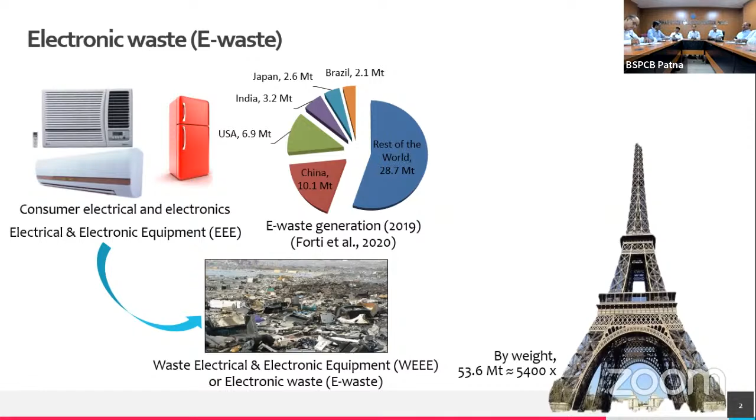From this recycled electronic waste, around 5,000 medals were made.

Now this is happening because of technology. This obsolescence stage is getting shorter and shorter, so we need to think about how to deal with this waste.

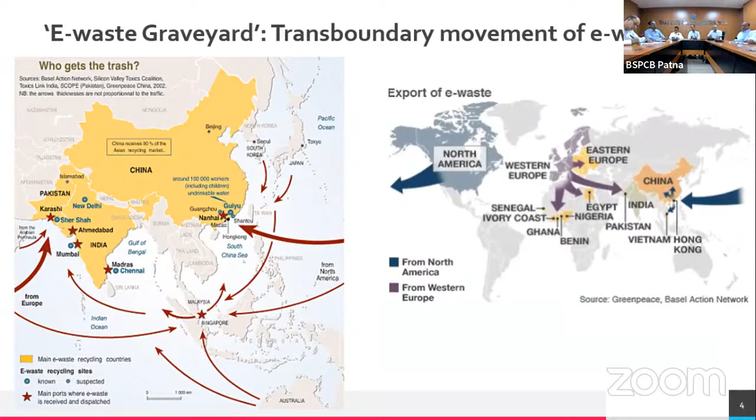Now let us look at the national status. So we have a timeline starting from 2005, where the CPCB estimate said 0.15 million metric tons, and over the years, by different organizations including CPCB, in 2012 it was 0.8 million metric tons. The latest estimate by the United Nations says India generated 3.2 million metric tons of e-waste, and we are rated among the third highest in the world.

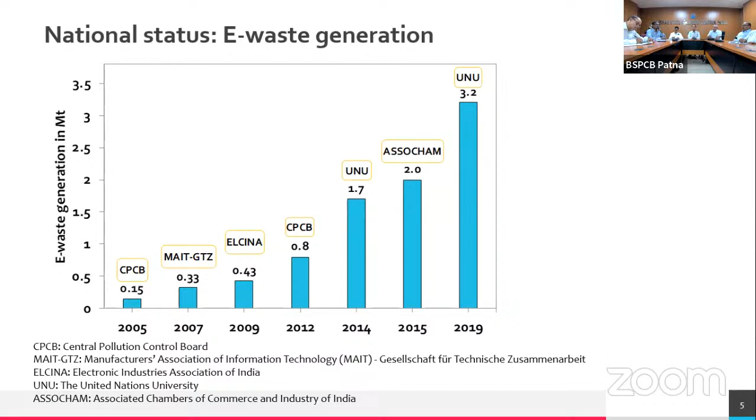Now this is a conservative estimate. Once we have statewide generation figures, in terms of percentage, in India, it starts with around 20% of generation from states like Maharashtra, Andhra Pradesh and so on, with an estimate of around 0.15 to 2 million metric tons.

What is e-waste generated in India? We are essentially... so if you look at the chart on the right side, you can see that only around 20% is formally handled, whereas a big percentage goes through informal channels.

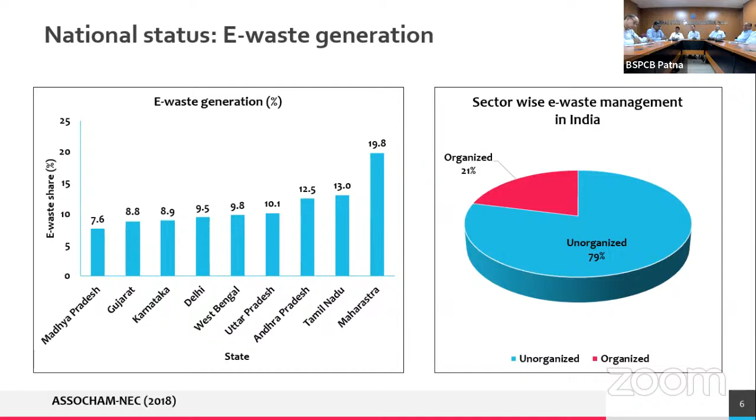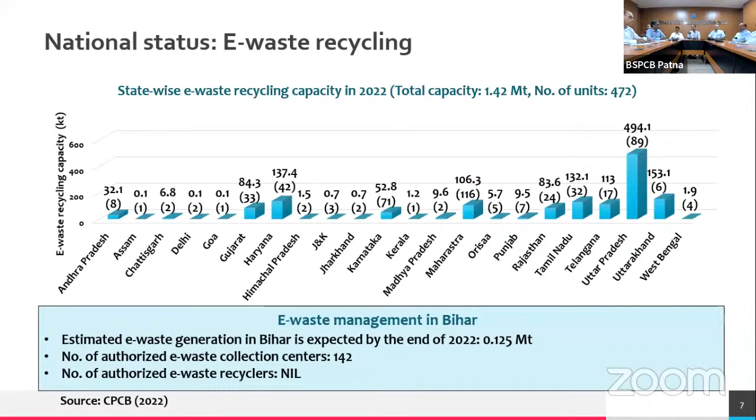This informal recycling sector operates mostly in Delhi NCR, where cheap labor is available and used for these facilities. We have a lot of such recycling sites there, and they typically use rudimentary or primitive technology.

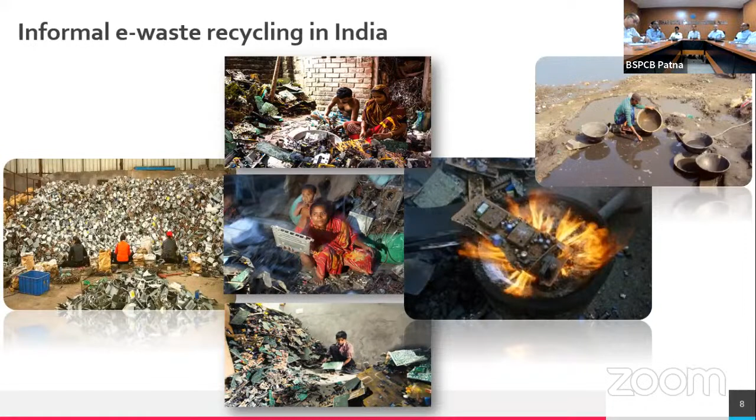Let's talk about e-waste regulation. First I will provide an overview of regulation all over the world. E-waste regulation started way back in the 1990s in Switzerland, Japan, and Germany.

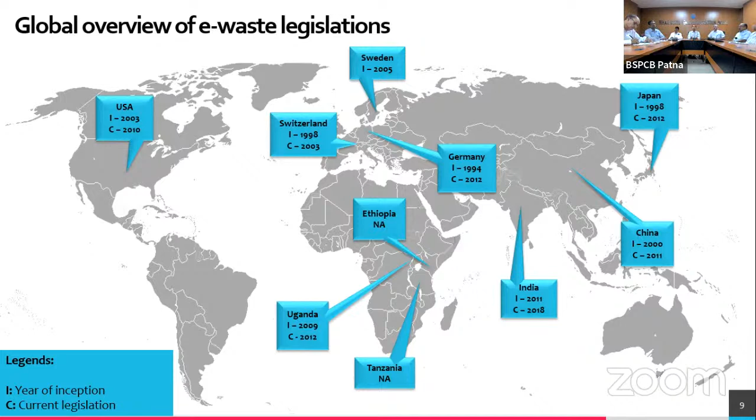In India, we started focusing on developing a system around 2011, with some earlier provisions. This was then amended in 2018, and right now it is known as e-waste management rules. These are the second set of features I will mention; I will not go into the next part as it is already being dealt with.

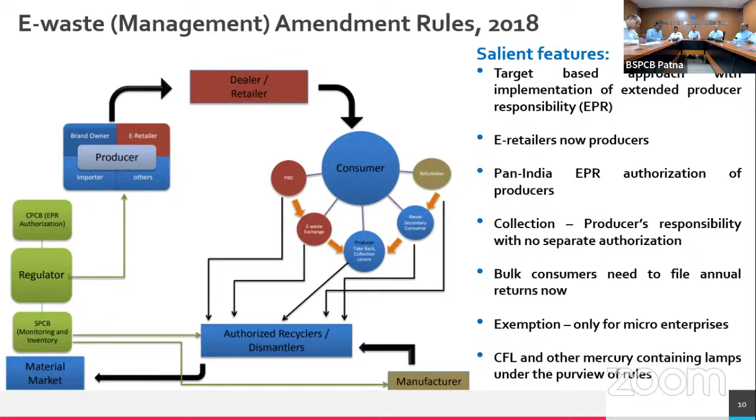So as I have mentioned, the stakeholders in this entire framework are essentially the generator, which includes the consumer and the bulk consumers. Then you have the e-waste handlers and processors, which include the producers, or the producer responsibility organizations through EPR, and producers also consist of the dealer, retailer, and e-retailer. Then you have recyclers and dismantlers, who come under the e-waste handler and processor chain. And then you have the regulatory bodies I have mentioned: the Central Pollution Control Board, State Pollution Control Board, or the pollution control committees in the union territories.

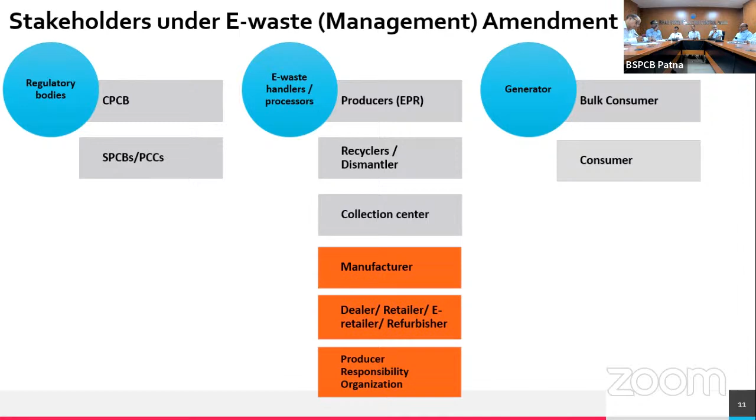Now let us introduce the circular economy, or the CE for e-waste, as a tool. So far, what we are doing is essentially getting a lot of natural resources, making this into a tech, then making this product, the electrical and electronic equipment, and then using it and disposing it. So what you have now is a take, make, use, and dispose model.

Now the circular economy is essentially a regenerative economic system, which transitions from this take, make, use, dispose model to a take, make, use, and regenerate resource model. Thereby, the e-waste which earlier used to be thrown away or disposed of improperly or unscientifically results in a lot of wastage of resources and economic value. Also, you have environmental pollution as well.

So transitioning from this take, make, use, dispose model to a take, make, use, regenerate resource model, we can have sustained economic growth, environmental protection, and it will also lead to a lot of job creation and societal well-being. This is in line with the sustainable development goals we need to fulfill by 2030.

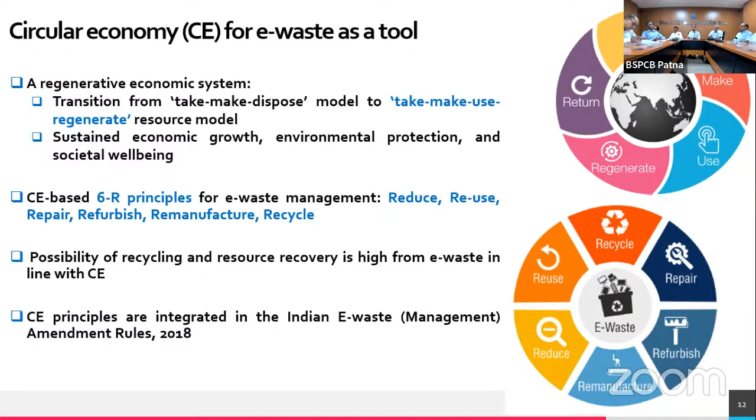Now let us look at the e-waste composition. If you look at e-waste as an overall stream, you will see typically around 37% glass and 30% plastic. We know glass has a typical recycling route, as does plastic, so we will not essentially focus on glass and plastic in this talk. Instead, as the title says, we focus on the metallic part.

When you talk about metals in e-waste, you mostly have iron, copper, aluminum, zinc, and lead. Although these are the metals most prevalent in terms of weight percentage, apart from that, most importantly, we have a lot of precious metals—you can think of silver, gold, platinum. They are also present in substantial amounts.

Apart from that, we have a lot of rare earth elements, which are not typically focused on in the e-waste stream. These rare earth elements are essentially pivotal for the development of any new technology in the electrical and electronic equipment sector.

Now, the typical source of these rare earth elements is ores from mining. These mines are monopolistically controlled by a few countries, including China. China has stopped exporting these rare earth elements. Another aspect is that the extraction of these rare earth elements from the ores is also very cumbersome.

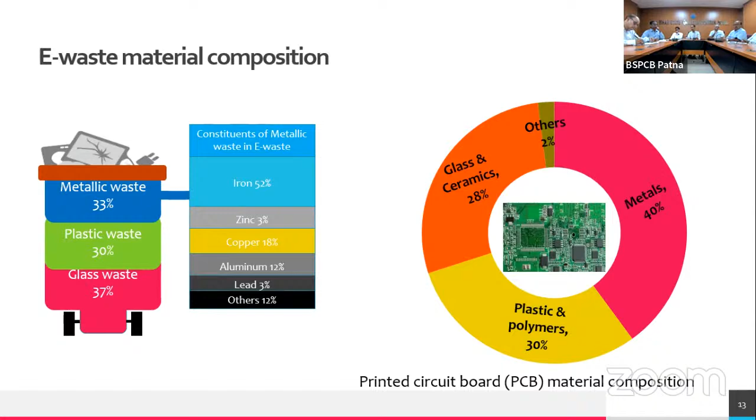Based on this, I can show you an example from our laboratory in IIT Patna, in the Pollution Prevention Resource Recovery Laboratory. Here you can see a typical end-of-life computer printed circuit board, with a lot of mounted components apart from the base material or platform.

You can name any element present in these mounted components, whether capacitors, resistors, or solders. Apart from these mounted components, the base or frame also contains a lot of metals. People will understand why we use gold and silver here - they're typically used as soldering material, apart from lead and tin.

We also need to provide a thin film over this, essentially of gold and silver, to protect these embedded metals from the corrosive environment. Otherwise, these electrical signal pathways will get corroded over the years. So a thin film of gold and silver is provided. This is one example.

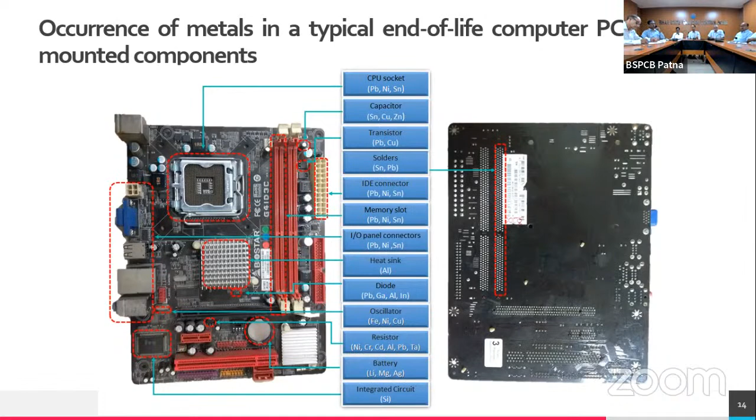Similarly, this is a typical printed circuit board of a smartphone. As you can see, the mounted components here - you name any one - contain a lot of metals, including precious metals and rare earth metals.

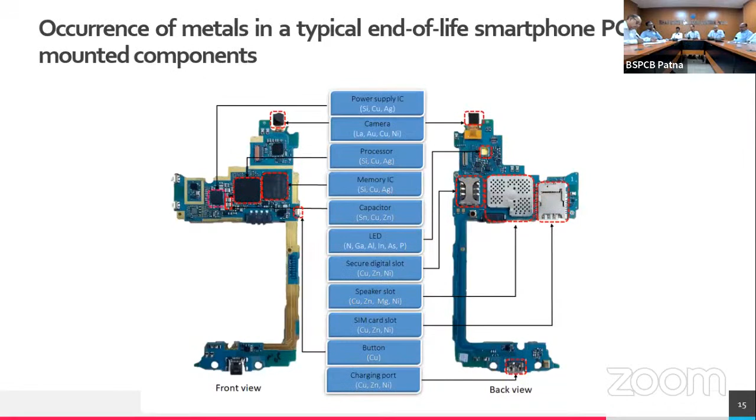Similarly, this is a typical printed circuit board of a cathode ray tube. Earlier we used to have bigger tubes, so this is a cathode ray tube television - not the smart TVs. This is the typical CRT TV's printed circuit board, and it's a bigger one.

You can see a lot of mounted components here as well, apart from the platform or base. Everywhere, whether in mounted components or the base, metals are present. Our job is to extract these metals from this complex platform so we can reuse them in manufacturing electrical and electronic equipment, integrating the circular economy approach.

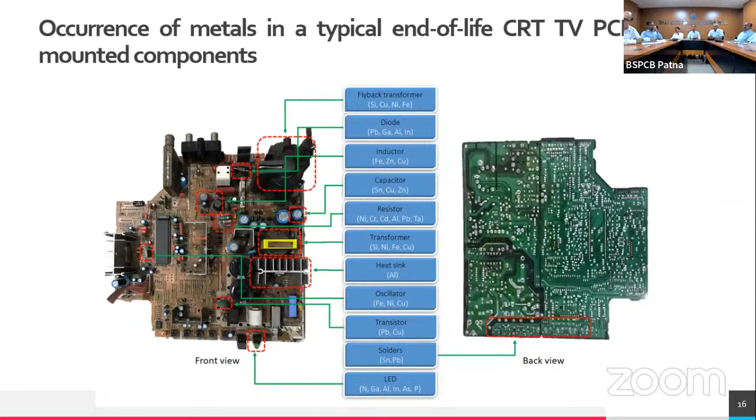Now, since we are talking about recycling techniques, particularly focusing on printed circuit boards, the metal extraction or metallurgical techniques are essentially three. One is pyrometallurgy.

As the name suggests, pyrometallurgy provides some kind of heat treatment, at elevated temperatures as high as 3000 degrees centigrade, to heat the printed circuit board. But remember, the base of the printed circuit board is essentially plastic or polymers. If you burn plastics, this can generate a lot of air pollutants, including dioxins and furans, which are carcinogenic in nature. Although pyrometallurgy is efficient in terms of metal extraction, it suffers from secondary pollution of air pollutants.

Then the second technique is known as hydrometallurgy, also known as the chemical leaching technique. Printed circuit boards are subjected to chemical treatment. Typically, we use strong acids or strong alkali.

What are the strong acids? Let us say any kind of mineral acid. The mineral acid could be sulfuric acid, or it could be hydrochloric acid or nitric acid. Once you extract the metals, efficiency was also very high, fine.

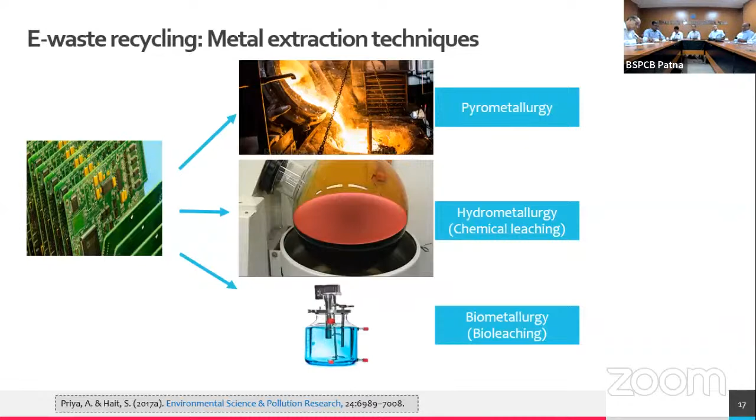If you look at the advantages and disadvantages from the environmental impacts point of view, the red signifies extensive, the blue is fair, and the yellow is low. For pyrometallurgy, hazardous gaseous emissions will be very high because you are burning the plastic, since the PCB matrix is essentially plastic. It will have a fair amount in hydrometallurgy, and the least amount you will get in biometallurgy with respect to gaseous generation.

With respect to wastewater generation, extensive wastewater is generated in hydrometallurgy, which could be corrosive or hazardous in nature. The least amount is in pyrometallurgy, and some amount can also be generated in biometallurgy, but biometallurgy wastewater is essentially biodegradable.

Based on this, you will have compatibility with the environment. High compatibility with respect to biometallurgy, followed by hydrometallurgy, and then pyrometallurgy. The least compatible with respect to the environmental component is pyrometallurgy.

Similarly, how much investment is required? The investment required will be very high in pyrometallurgy, followed by hydrometallurgy, and least in biometallurgy. Similarly for energy consumption, since we need to burn the waste, we will have high energy requirement in pyrometallurgy, followed by hydrometallurgy, and then biometallurgy.

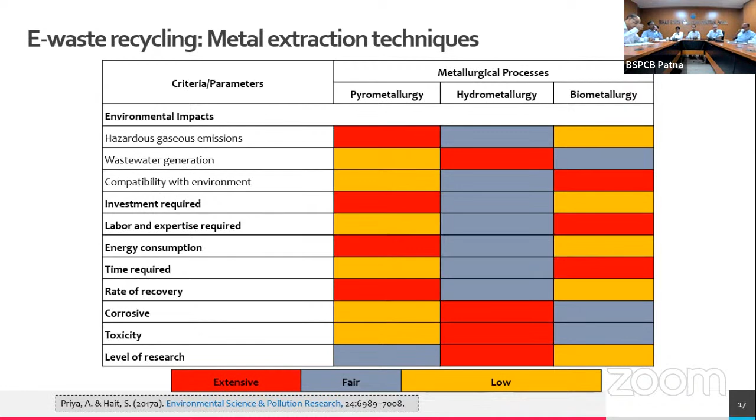So based on this, what was our motivation to work? If you look at the printed circuit board with respect to its structure, manufacturing process, and composition, they can be of various types. This printed circuit board comes from various electrical and electronic equipment - some IT and telecommunication equipment, some consumer electrical and electronic equipment, some large household equipment.

So our motivation was to understand whatever printed circuit boards we are getting from various electrical and electronic equipment, how they are different in terms of composition, because when you go for recycling or metal extraction from the printed circuit board, first we need to know how much metals or valuable metals are present, and how this printed circuit board from different electrical electronic equipment or products is varying. So this was one motivation.

Second motivation was, if you do not dispose or recycle electrical and electronic equipment in an environmentally sound way, once they become obsolete, you throw them into the open environment or into the solid waste stream. If they get exposed to water, surface water, groundwater, or acid rain, they will ultimately reach surface water and subsurface groundwater and contaminate them. So if you unscientifically dispose or recycle them, they will create environmental pollution, loss of resources, and economic loss as well.

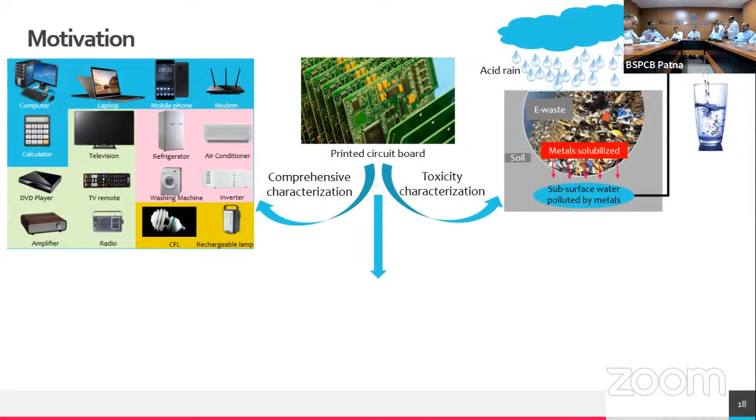Then, with respect to technology development, as I mentioned, hydrometallurgy techniques mostly use chemicals, particularly mineral acids. But our motivation was to not use any mineral acid, and instead use organic acids, which are biodegradable when disposed into the environment, or to use some kind of biopolymers or green chelators.

Then, looking at the biometallurgy or bioleaching technique, in nature microorganisms generally grow or work together in tandem, in symbiosis. Mostly studies have used a pure culture of one particular type of bacteria. So we wanted to explore whether we could have some kind of mixed culture of various types of bacteria which can extract metals from the printed circuit board.

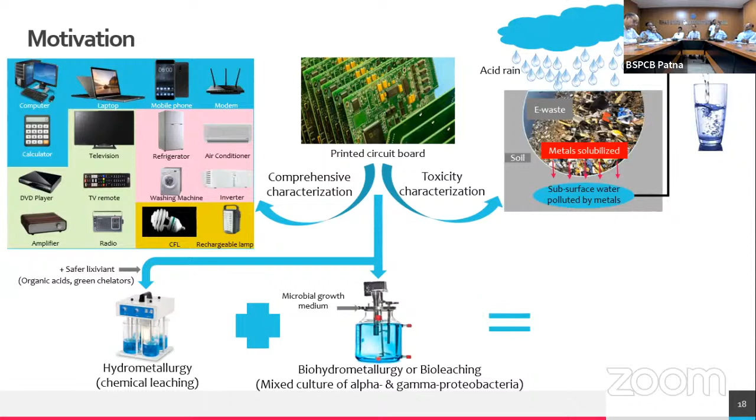Since biometallurgy or bioleaching techniques suffer from the drawback of higher time requirement, we wanted to explore whether these two techniques could be combined — chemical hydrometallurgical technique using a safer lixiviant, organic acid, or green chelator, along with biometallurgy or bioleaching. This could lead to a hybrid bioleaching technique, combining chemical leaching and bioleaching, thereby improving process efficiency and reducing time requirement.

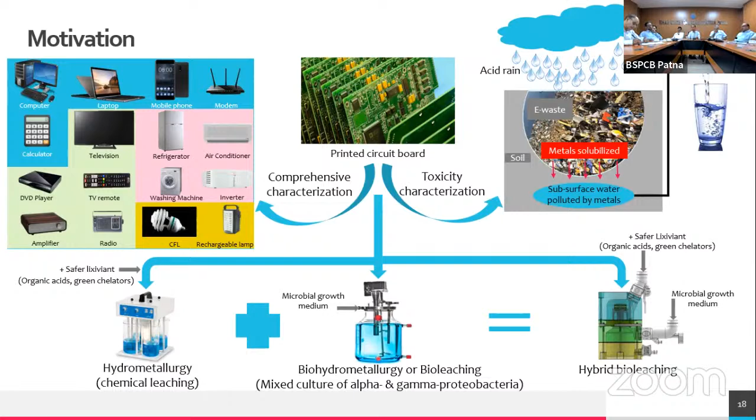With all these modifications, let us first look at the characterization of printed circuit boards from various end-of-life electrical and electronic equipment before recycling. We covered almost 16 electrical and electronic equipment types, covering IT and telecommunication equipment, consumer electrical and electronic equipment, and large household equipment. From each equipment type, we collected printed circuit boards from two different brands, three boards each — so 16 equipment types, 2 brands, and 3 printed circuit boards each from each brand.

Then we characterized almost 33 elements — general elements, toxic elements, precious metals like gold and silver, and also rare earth metals or rare earth elements. We also noted how the printed circuit boards vary in terms of their weightage within a typical electrical and electronic equipment. Methodologically, we pulverize or crush them, then acid digest them in a microwave digester, and determine the metallic content using ICP-MS.

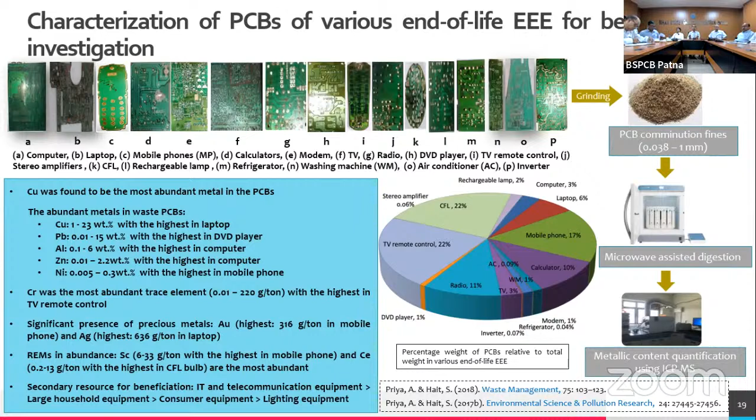Now we wanted to also look particularly at a product, let us say mobile phone, and how their metal content had changed over the years. We have had basic phones, say in early 2000, and then subsequently 2004 or 2005 we have smartphones. How their metal content had changed, and during that period also, at the beginning, a lot of international legislations had come.

Let us say you will have restriction of hazardous substances, or use of restriction of hazardous substances in electrical and electronic equipment, and also we have had the waste electrical and electronic equipment directive - those are essentially in the European Union.

So we wanted to look into whether, in a particular segment of electrical and electronic equipment, the manufacturers and producers have mostly focused on their market profitability, or have focused with respect to environmental well-being or environmental protection. That's why we chose mobile phone as a product, and how their material compositions in terms of metal have evolved over the years.

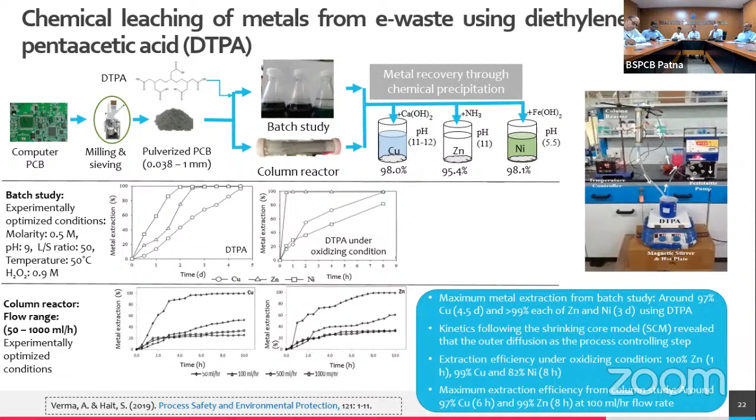Following extraction from the printed circuit board solid matrices, we again recovered the metals using chemical precipitation. The recovery is pretty high, more than 95% for all the targeted metals. So chemical leaching can also be utilized without creating secondary pollution, and it can contribute to the circular economy.

The only thing is that we are not using mineral acid here; the problem is that it requires comparatively higher time. So there has to be some kind of trade-off between whether you want to harm the environment or have a safer environment.

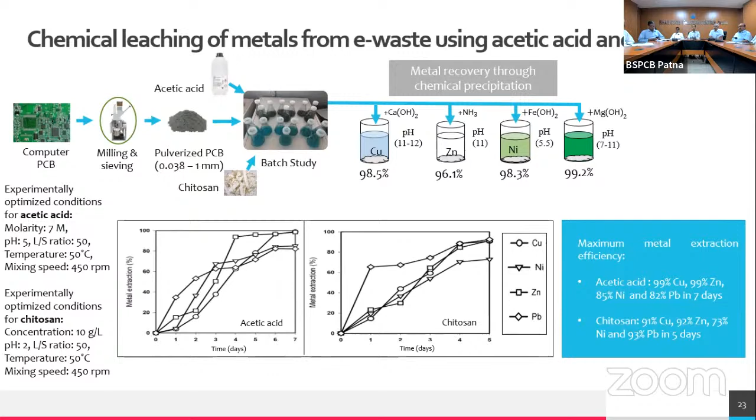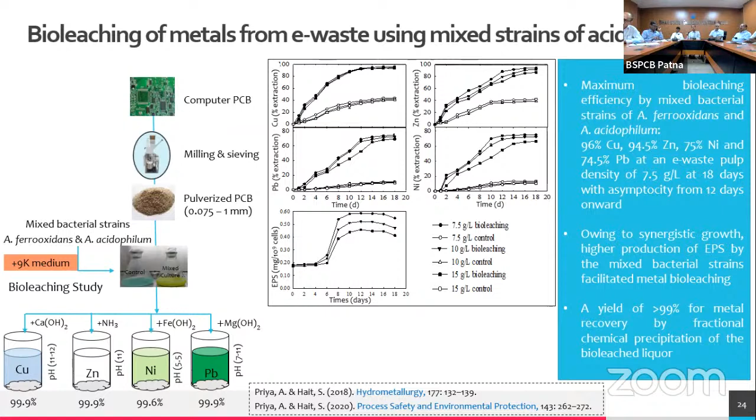From this biometallurgical technique, whatever metals are extracted can be further recovered using chemical precipitation, or one can use solvent extraction or other standardized techniques. We can see that even the selective metal extraction efficiency is also high in this case.

If you look at the mechanism of how the microorganism acts on the solid PCB particle, which we have ground beforehand, one mechanism is that bacteria, as part of their natural cycle, produce a lot of exopolymeric substances. Once they excrete this, they bridge between the PCB particle and the bacterial cell. Now, in the media we provide, 9K media, we also provide some iron salt, so you have plenty of iron available.

One mechanism is called the direct mechanism. The bacteria attach to the PCB particle using exopolymeric substances, and then act on the ferrous iron present in the media, biologically oxidizing Fe2+ to Fe3+. This Fe3+ then acts on the metals in the PCB, which are in the ground state. Since Fe3+ is a strong oxidizing agent, it knocks the ground state metal to Mn+, essentially bringing them into ionic state, making them available in the liquid medium. This is what we call the direct mechanism.

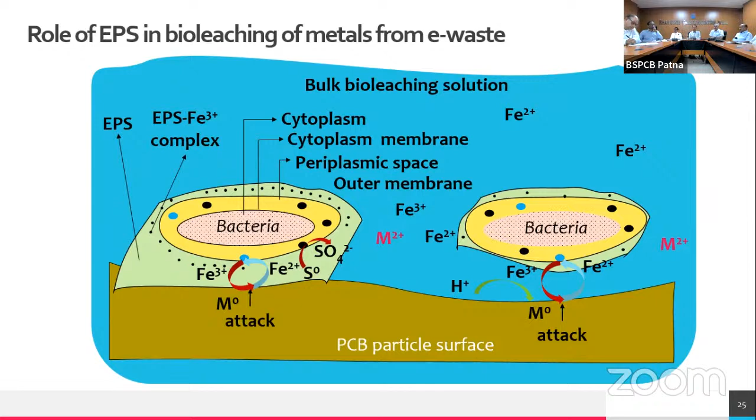Now, what we have seen in the biometallurgical technique is that even using a mixed culture of bacteria, it is very efficient, but the time requirement is still 12 days. We wanted to bring down this time requirement, so one motivation was to combine chemical leaching using safer materials along with this biometallurgical technique. So what we did was a jugaad method, like what we use in day-to-day life.

So what we used is the biometallurgy as explained, and apart from that, we added lemon juice, which contains a lot of citric acid, an organic acid. So pulverized printed circuit board, the mixed culture of bacteria, along with lemon juice containing citric acid, gives us two actions: one is the biological action, another is the chemical action by the citric acid. That's why this is known as hybrid bioleaching. This chemical process could be anything; we used citric acid, and I will also show later that some kind of enzyme can also be used here.

Once we have this hybrid bioleaching, we can also recover the metals using chemical precipitation. The results from hybrid bioleaching, using bacteria as well as citric acid, show around 98% of copper, 98% of zinc, 81% of lead, and 78% of nickel. But the time requirement is still 12 days. So the efficiency improved, but the time requirement remains at 12 days. We wanted to further work on how this metal extraction time requirement could be shortened.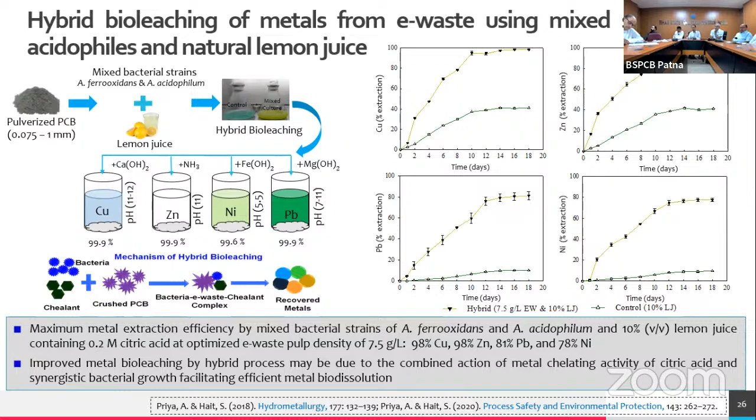Based on this, we have developed a two-step sequential hybrid bioleaching technique. Let me explain. Initially, in the single step process, we used to have a printed circuit board, the grounded particles, bacteria, and media added together in the reactor. Then we got metal extraction, followed by metal recovery by chemical precipitation.

So here, if you have a lot of ferric content, that ferric content is responsible for the metal extraction. What we wanted was to first grow the 9K media bacteria, so that whatever Fe2 plus is in the media gets fully converted to Fe3 plus. So when you add the printed circuit board, all the Fe2 plus has already converted to Fe3 plus, so that all the Fe3 plus can attack the metal present in the printed circuit board.

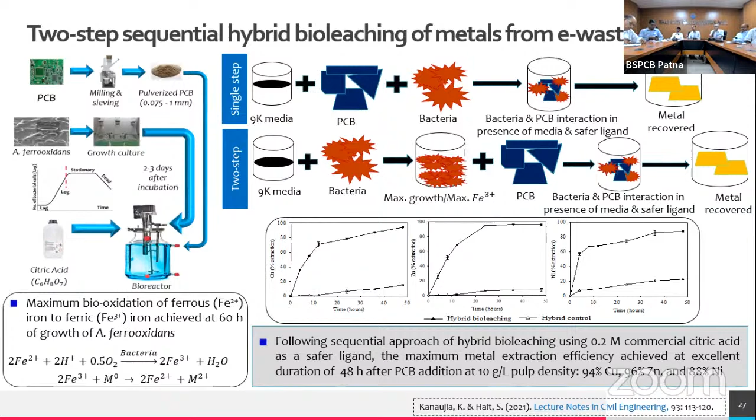So that is the two-step sequential hybrid bioleaching of metal from e-waste. We also wanted a similar hybrid technique, typically favorable in wastewater treatment, where people use bioleaching. When you employ microorganisms, there is a lot to properly maintain, so can we think of using their product as a catalyst instead?

Let's say we use glucose oxidase as an enzyme biocatalyst, typically used in the bio-Fenton process in wastewater treatment. We applied the same process here in e-waste management of the printed circuit board: glucose oxidase with pulverized PCB, in what we call enzymatic bioleaching. For the first time, we showed that the hydroxyl radical generated during this process will partially degrade the polymer matrix of the PCB particle where the metals are embedded, partially dissolving the matrix and thereby facilitating the metals embedded in the PCB to dissolve into the liquid medium.

So by doing this, what we have seen is that in a lesser period of time, we have also got similar kind of efficiency. So if you do not use microorganism directly, but instead use some kind of biocatalyst or enzyme, you can have a similar or improved efficiency with shorter process duration.

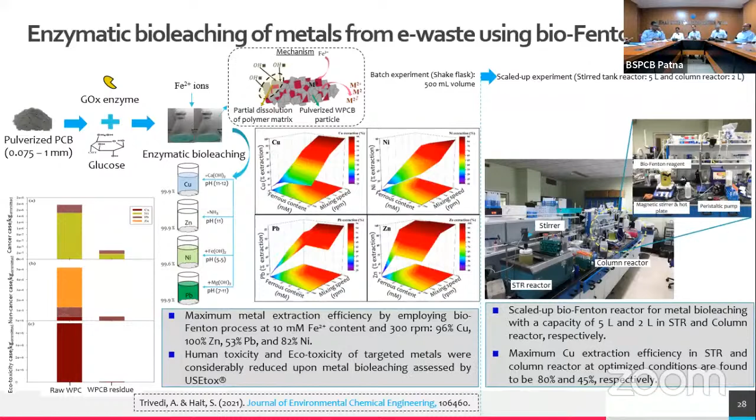So this process can be scaled up further, or can be taken up with a proper pilot scale study. This can be scaled up to the industrial scale as well.

So in a nutshell, if you look at all these techniques, mostly they are eco-friendly. And if you look at management or organizations, you have some kind of SWOT analysis: strength, weakness, opportunities, and threats. So far, whatever biometallurgical techniques we have mentioned, they essentially look at an integrated and holistic approach without creating any secondary pollution. That's why you can consider them eco-friendly techniques, with simple operations, high efficiency, and low energy requirement, unlike pyrometallurgy. These are considered the strengths.

What are the weaknesses, and can we try to convert that weakness to our strength? With respect to weakness, in the biological technique we need to use commercial media or chemicals. Can we think of some waste material which can be co-treated with the printed circuit board, and can support the microorganism or serve as the media? So we are also working in that direction, to have co-treatment of printed circuit board along with some other waste stream.

Also, we have seen that if you increase the waste quantity in the reactor, efficiency comes down. So this is also a weakness. We are trying to look into this pulp density restriction, to alleviate it, and working further so that this weakness can be turned into strength.

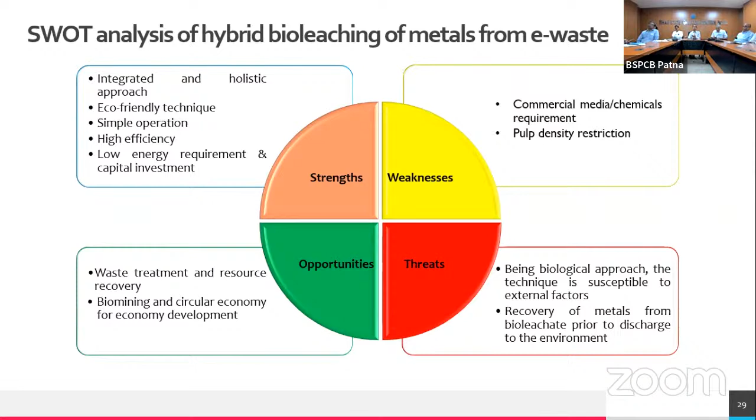And for the recovery of metals, we need further techniques - we are using chemical precipitation. We can use many other techniques, such as solvent extraction, and that can also be made more efficient. So this is what we have in the SWOT analysis.

So in a nutshell, if you look at this metallurgical technique, linear versus circular economy, whatever we have demonstrated through our research, whatever was earlier used: you get these metals from mining or resources, then you manufacture, then as a consumer you purchase and use it. Once they are obsolete at end of life, you dispose them into a landfill. By doing this, we are creating environmental pollution and wasting resources, and thereby we have a lot of loss of development.

What we are trying to transition to from this linear model is the circular economy model, where you get it mined, then manufacture it, then purchase it, use it, and once it is end of life, through various schemes as mandated in the waste management rules - whether it's a take back system, collection centers, or refund scheme - you collect it, and using environmentally sound techniques, we recycle them so that these resources can again be reutilized for manufacturing. Thereby we can have a transition from linear to circular economy.

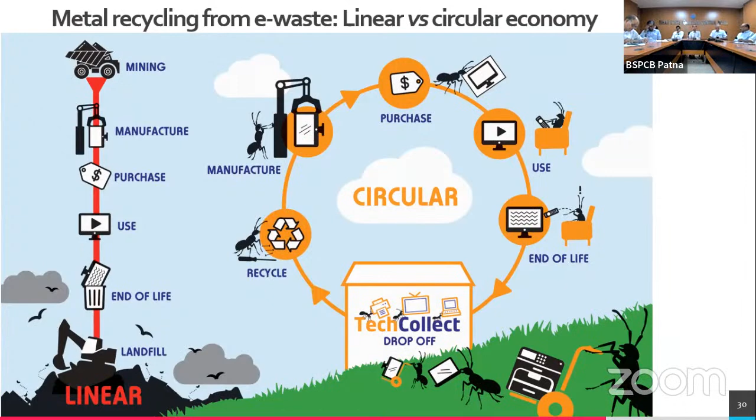So this is what we are saying about metal recycling from e-waste - linear versus circular economy. And that transition is very much needed in order to achieve the sustainable development goals by 2030, even in waste management. So I will stop at this.